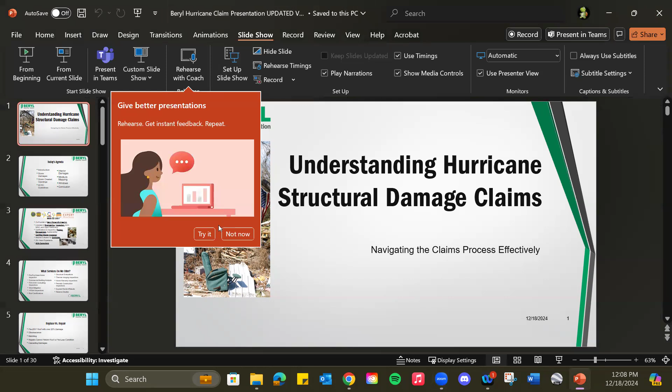Next slide. The bottom right is the flood. There it is. Next slide. I always wanted to say next slide.

We're going to talk a little bit about an introduction, which we're currently in, a brief overview of what storm damages are or not. Talk specifically about storm created openings, a nice buzzword insurance companies are using to deny a lot of claims. IICRC guidelines, basically mold assessments, mold remediation guidelines, interior damages, some moisture mapping, stuff about windows, and then a conclusion to wrap it all up. And we're going to get through all that in 40 minutes. It's going to be exciting.

Next slide. Who am I? I'm one of the founders of Beryl Project Engineering. I believe we've done work with most, if not all, of your firms before. I have licenses in engineering, inspection, mold assessment, mold remediation, wood destroying organisms, liquor distribution, certifications in inspection, project management, sustainability, certified master inspector, neutral evaluator for sinkholes.

So I have been on the umpire side of the table. That's always fun to do. That should change the 20 years to 25 years, I guess, and a 203K consultant.

A little bit about Beryl. We offer the gamut of inspections, everything from your pre-purchase home inspection to the point where the state of Florida had us do 18,000 inspections for the My Safe Florida Home program. We'll do commercial building analysis, FHA 203K and consulting inspections. That's the kind of sandwich your renovation loan inside of your mortgage. Windmits, 4 points, roof certs. This is the to get insurance batch.

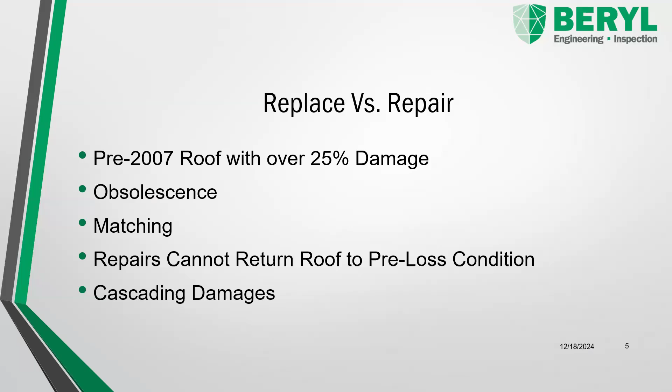Next slide. In addition, we'll be arguing about storm damages. These come straight from the National Academy of Forensic Engineers, December 2020 edition: broken tabs, broken tiles, lifted shingles, kicked tiles, which are those that are kicked up, crease shingles, which are my favorite. I love explaining to a jury how to find a crease, the difference between a storm-created crease and an age-related or person-related crease. Missing tabs, missing tiles, those are easy. Impact damages, those are easy. Stained sheathing is my storm-created opening. Damaged soffits, vent metal warping.

But back to the broken tabs and lifted shingles. I'll spend a lot of time in depositions talking about when a shingle ages and wears, tear and deterioration, a common defense. That one sits with: the shingles are just old. And I'll sit in deposition after deposition and say these shingles aren't old. When a shingle hits the end of its useful life, you have a surfboard, and on top of that you have roadway. The roadway starts to fall off, and you're left with the surfboard.

You'll end up with frayed edges around the side of the shingle. You'll end up with silver streaking you can see from the street on the shingles. You get close to the shingles, and you won't see granules anywhere near the edge or middle. There's this tool a lot of field adjusters will use, a Haag tool, and they'll slide it into a shingle and say 30, 15 - that tells you how much useful life's left. I use those photos time and time again to disprove age-related deterioration because the tool that they don't know what it means, they just know to take the photo, is saying this roof doesn't have any age-related issues.

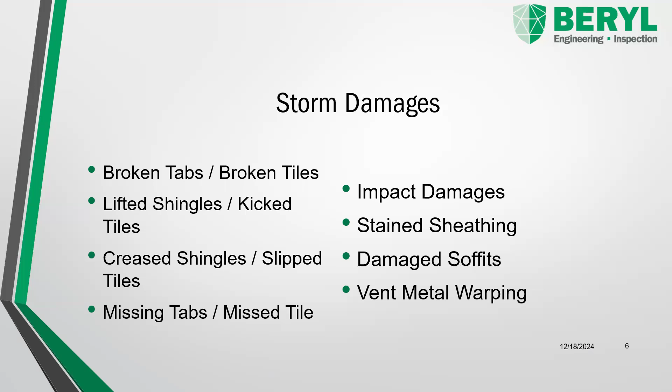Next slide, here's some pictures. This would be a good example of an old shingle. We have all this missing granules here. We have this crease here going this way - this is the bad stuff, this is stuff we don't want to find. I do have some creasing here, but with all this stuff here and here, I'm going to say that's probably age.

This is a broken tile. This is in a good high foot traffic area. It's a nice circular hole. I got something coming in - it's going to be foot traffic. I look for this, I look for the hole, I look for radial cracking from where the foot hits. It's in a high impact walk zone, so that's going to be more age-related.

This one's another bad example of a broken tile for wind because it's in a corner. It's got an apex crack that goes across here, so that's going to be from pressure. So what I do like using are right corner cracks. They'll say that's the weak part of the tile. I'm like, great, yeah, it's the weak part of the tile - that's the first thing to get wind damage. That's the way I spin it.

They're like, the manufacturers even know this is the weakest part of the tile. I would expect to find right corner breaks on wind damaged roofs, because that's where wind's going to manifest first.

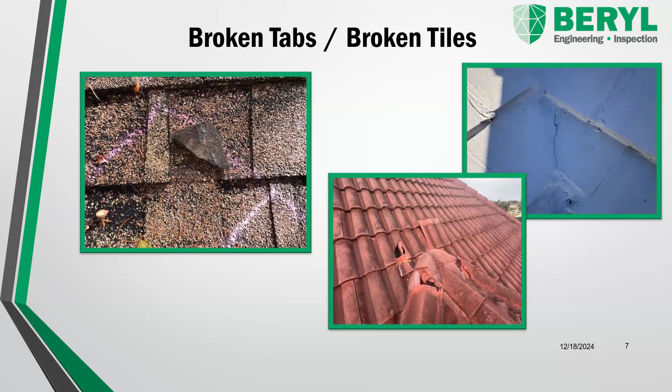Next slide, lifted shingles. Again, we've got something that's kicked up in this direction. Newer roof, you'll hear stuff about mat transfer. What that's talking about is right here, this is the sealant, sometimes it sticks to the top of the shingle. They say mat transfer is used to say it's not wind related. I say it is wind related. The shingle's been forcefully torn up, and some of the seal is now on both parts of the shingle. So I look for that in my wind damages.

Here's some kicked tiles. This is a whole section here that was removed by wind. High impact wind zone, I want to see damage according to the hips. I've also got missing pieces of tile here, this is in the upper right hand corner. Again, stress cracking from wind because that's chattering. Same thing here, so this is some juicy storm damage right here on both of these.

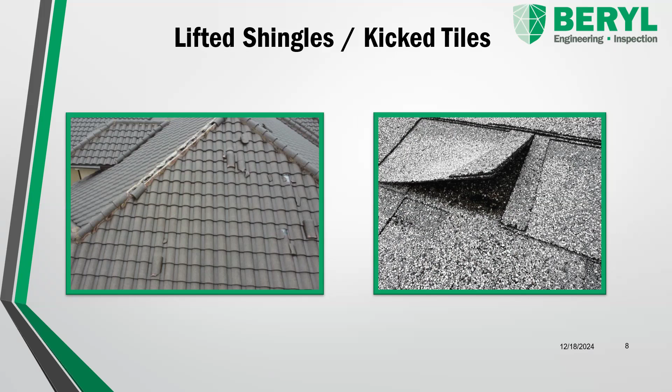Next slide please, crease shingles. Again, we're looking for this line here, and I had more that were subtle. But I wanted to have some that you could see from a distance, because I've been in presentations with a chart you can't see. So I went a little bit more obvious on this, but I'm used to this light creasing here, something even a little lighter than that. I'll use that with the jury. I'll show a jury how to find crease shingles at this point in the shingle, and then they start finding it themselves later in the photos.

These are slip tiles. What I like about slip tiles is two things. If it's held in place by a fastener, that means the fastener hole is enlarged, that tile is damaged in the area you can't see. I do that all the time. If it's gravity held, even better. The tiles have all slid out of place and now there's a whole bunch of holes underneath there in the underlayment. But what's neat about the slip tiles with a fastener is that tile has cracked and allowed the tile to slide down, that nail hole is shifted, and those are all potential storm created opening points.

So that's fun. And then here's our mega slide showing everything: flapped over shingle, creased shingle, there's a subtle one, torn tabs, missing shingles, just blown off. This is a horrible example picture that was pulled from stock photos, so I'm creating that for our viewing enjoyment. And the reason why I can tell is because this is too perfect and none of these nails are rusted.

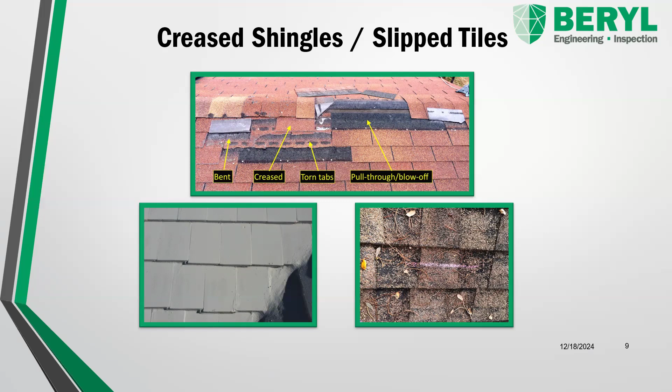So here's an example of some missing tabs. This is more like what we'd expect to see, very jagged at the top. And then, obviously missing tiles, or missing tiles.

So stained sheathing, here comes the storm created opening argument. I will argue a causality effect. We are not going to remove every shingle to see the holes that were created in the storm event. But if we have staining in the room that we're standing in, the interior, and we have staining above that in the attic level, either at the trusses or at these junction points, we have staining in the attic and we have staining in the interior and we have functional storm damaged shingles at the roof level, that's a storm created opening.

Now you'll hear stuff about wind driven rain. Well, if it was wind driven during a storm event that went through a roofing system and it hasn't leaked since, it's a storm created opening. Storm created openings conceal themselves after the fact. The mere fact that water came into the building during a storm event is a storm created opening. The exception would be if there was a vent and the water blew into the vent and then came down, that's wind-driven rain. But all this other stuff they're talking about as wind-driven rain, those are all storm-created openings.

It's functioning fine up until the storm. You now have stained sheathing. So all you have to do is show functional damage directly above where we have all this stained sheathing, and we start to draw the parallel causality effect, which wins time and time again.

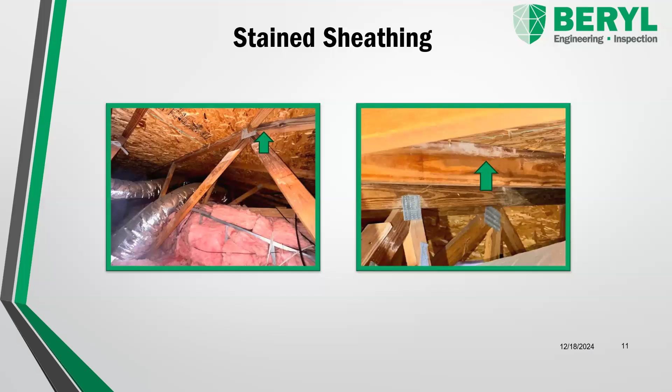To do that, next slide please. Oh, we talk about that again later, that comes in a later slide. I thought that was a good beginning for that.

So the other thing we looked at is you'll get arguments that, and Rimkus and Haag love to use this one, these are the areas of the roof that we would expect to see damage first. That chart, table 301 in the Florida Building Code. I would agree with them.

Normally, those would be the areas that expect to find damage first. However, the Florida Building Code makes up for that because you need to build that section of the roofing material with starter shingles, extra nails, extra bowl (sealant) — all the stuff you don't use in the rest of the roof. So the argument goes away when you say these areas are more prone to wind damage, but they're actually built stronger. So you can't use that as a guideline for the field damage we talked about earlier, because that wasn't built as strong.

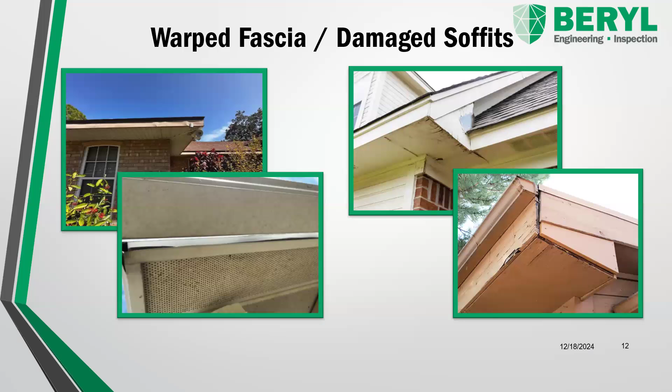Next slide. We look for suction damage on these soft metals — these are like soda cans up on the roof. So we look for crinkling here. My favorite: tile roofs with 4-foot offset vents. Those crinkle and crush like a can. I love seeing that on a Hurricane Ian claim when they're rusted. If they're rusted, it's Ian. If they're not rusted, it's Milton. Takes about 2 years for that rust to set in.

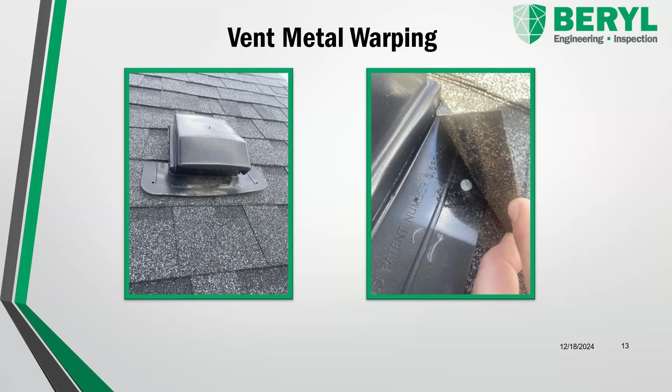Next slide, please. Now we're to where I should have moved the stained sheathing — if we do this again, move the stained sheathing here. So how do we create the storm-created opening, the causality effect?

We use sample squares, the scientific method. As scientists, we're allowed to use a sample size to determine a whole. We try to avoid being technically exhaustive. The best way to inspect a roof would be to tear off the entire roof, look at the entire underlayment, then the entire sheathing — but that's not going to happen. The next best thing would be to inspect the entire roof and try to lift the bonds on every single shingle — also not going to happen.

So in 2004, Haag came out with a test square methodology they used for hail damage: find 100 square feet of roof, count how many hail strikes are within that 100 square feet, and if there's more than 8 hail strikes, the whole roof needs to be replaced. We started using a piece of it for wind damage claims, not the 8 — we go back to the 25%. Haag has now publicly discredited their own methodology.

So now we've shifted how we're presenting it. We no longer call it the Haag 2004 test square methodology — we call it a scientific method, sample square methodology. Still works. So Haag has just discredited their own methodology for no reason, because we still have a way to use it.

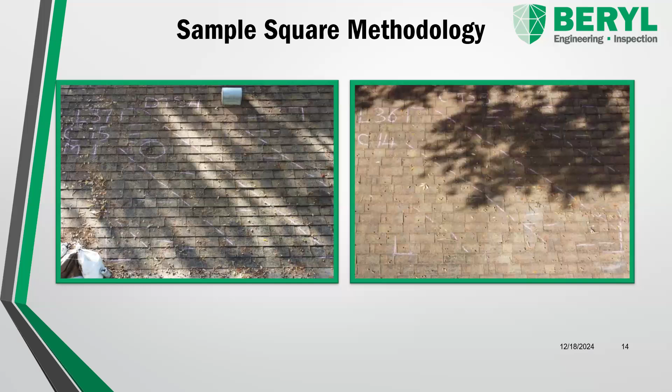Do you suggest taking your sample square where there is damage? Go directly over it. Yep, directly do your sample squares over it, because now we've got storm created openings. You want to do it, it's the easiest way to show it. You say, I'm standing in my living room looking up, I'm in my attic above the living room looking up, and now I'm on the roof looking down. Damage, damage, damage. It tells the complete story.

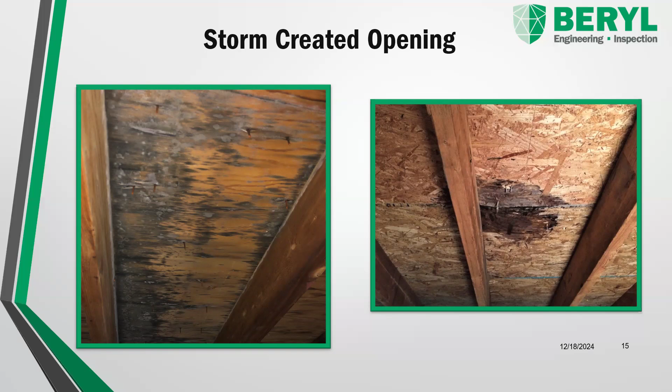IICRC guidelines. So basically now what I love to do is, there's this common misconception, and I have to do this in every single mold assessment deposition, they're like, what kind of mold is it? Did you send it off for laboratory testing? You do not have to do laboratory testing. It is such a common misconception. It is a test question, mandatory to get your license. It is a mandatory test question on all the CEs to maintain your license. You do not have to test to know what the mold is.

If it's present, it needs to go. If the drywall has been wet for more than 72 hours, there's enough literature out there to say some level of mold exists there. So you can start tying into your claims some level of mold remediation. I know there's caps and limits on that, but that gets you drywall cut out, not repainted. That gets you entire rooms repainted. If the stuff's touching the baseboard or the flooring, we've got flooring that needs to be removed, and you guys all love the continuous rule—if it's continuous, we've got to do the whole thing. So this is how we get there.

All we need is something that's wet for 72 or more hours. So with a Hurricane Milton or an Ian, where power was out for 96 hours, we're there. We've got mold there. Might as well just start including it.

Water will be divided into 3 categories and 4 classes. Categories: where did the water originate? Clean water, basically from the sky. Gray water, stuff that's run through pipes and started off as clean water. Or black water, sewage and stuff that's run—like if a supply line breaks, I'll call it clean water or gray water. If a sink faucet breaks or something, that's going to be black water. So the thought behind that—other mold assessors take the stance that if it comes from the sky but makes its way through your roofing material, is it still technically clean water? I take the stance that it originated in the sky, so I would call it clean. So for pretty much me, I pretty much stick to categories 1 and 3.

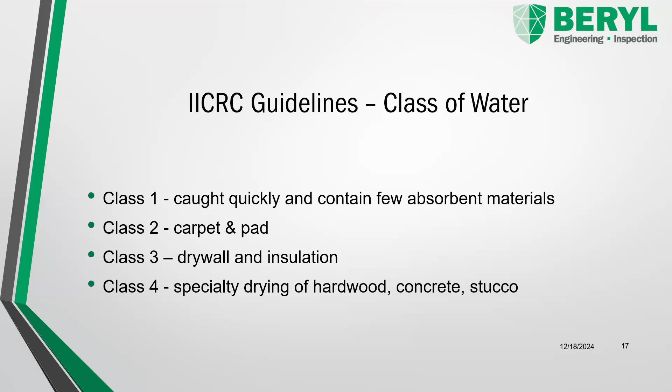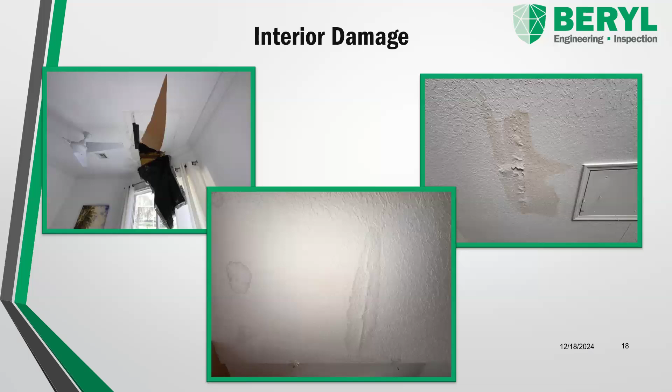Next, the way we're going to find this out is using thermal cameras, predator vision for the Arnold Schwarzenegger hiding in the jungle bush, or moisture meters. The neat part about the thermal camera is it gets us in the area of the potential. Then we can hit it with a moisture meter and it's going to be wet or dry. If it's wet, it's an active leak. If it's dry but shows up like this, that's a former leak.

What's neat about this is I can tell all the insulation's been pushed away, so that insulation is not how they installed it. The only thing that would have caused that are rodents who decided to take that insulation elsewhere, which wouldn't be at this level, or a water effect that pushes all this insulation down towards the ground, and now you're just left with that temperature differential. So even if the leak isn't active, we can still use thermal cameras to prove that it happened, which ties back to a storm created opening. It was leaking during the storm event, it wasn't leaking after. More proof it was storm created and storm sealed. Still needs to be remediated.

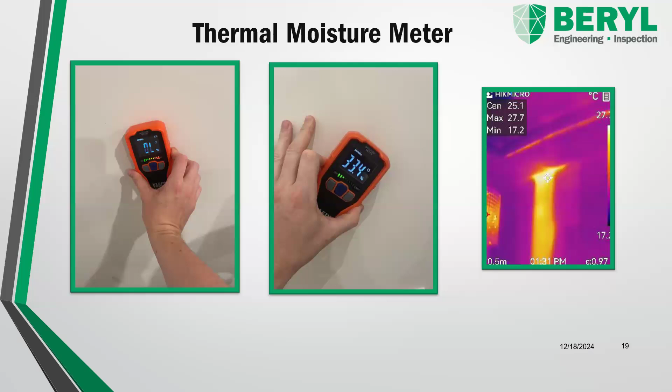Next slide, please. I want to talk about windows. Love windows. So if you look at FEMA P62 and 752, and the North American Fenestration Standards 2017, 2022, they'll talk about pressures necessary to overtake windows. They're a lot lower than you think. People think they're putting up storm shutters to protect their windows from hurricane pressure. No, it's just hurricane debris. I have seen windows blow out and shatter with sheathing plywood or storm shutters on the windows. Those shutters are just there to stop debris from coming through, not for the pressures generated from these storm events.

So you have to think your house is normally under positive pressure. And if you think about how we track hurricanes, we track them by their pressure. It's moving at 75 mile per hour gusts with 989 millibars. Then they get to 899 millibars, and now we're looking at category 5, 157 mile per hour sustained winds. The fancy physics equation, PV equals nRT, explains the science behind that. But when it comes time, and Shay's heard me do this before, I never track the wind speed of a hurricane, I'm always tracking the pressure. Lower the pressure, the stronger the storm. Even if the storm starts to weaken, the lower the pressure was, the more energy the storm has. And that was the big talk about Milton, the fact that once it became a category 5, we were still going to see these devastating winds no matter what wind speed it actually hit when it hit St. Petersburg, and we saw that from the Trop roof. The energy that happened when that thing was category 5 is what took out the Trop roof, not the 90 mile per hour winds that hit it.

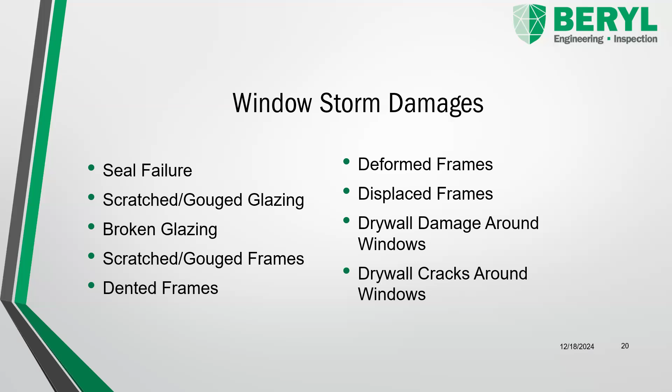Next slide, please. So we start to see areas here, like the argon gas that's in a dual pane window, we start to see that's all fogged. We can hit it with thermal cameras, we can see the energy just leaving, but this is what we're looking for with seal failure. When seal failure happens to a window, the glass needs to be replaced. Can you replace the glass reasonably without replacing the whole window? Well, different arguments in different directions there. Next slide.

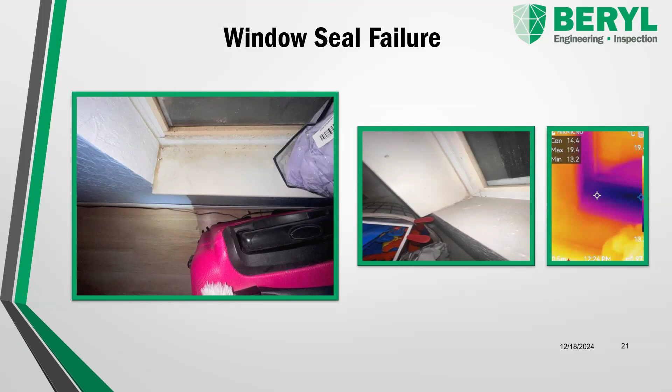These are from impacts. I think this one might have been a raccoon attacking a window. That's like a new Blumhouse movie coming out next month about the wolf man. This is what happened to this window - feral child. Yeah, that's an impact.

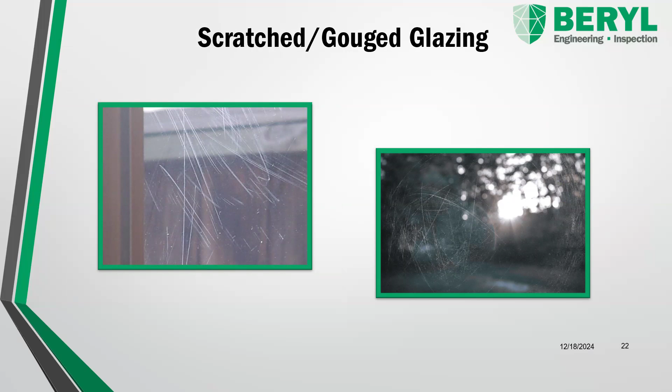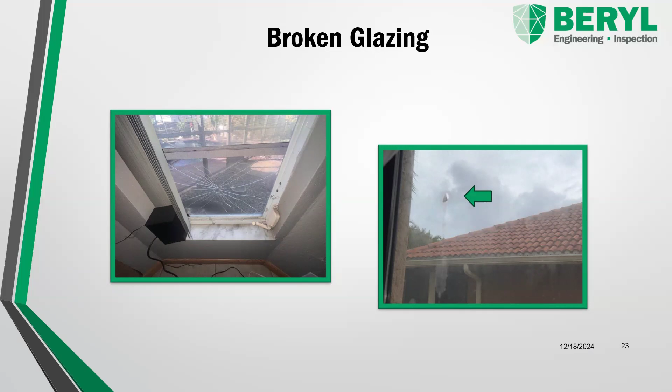So basically we're looking for impact damage to the window, but we're mostly going to find seal failure like we saw on the one before it. Broken glazing, shattering the windows, damage that's not even full shattering - that's what we're looking for. But again, seal failure, thermal cameras, that's mostly what we're going to be using, because this stuff is great, but we don't find it too often.

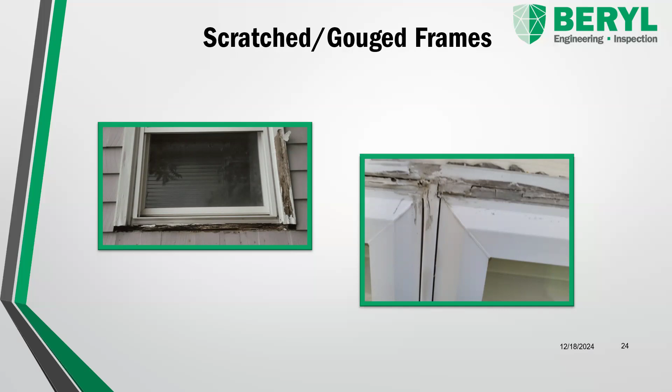And then we look for separation of the framing. They'll argue maintenance. Sometimes there's something called Sebo analysis, where even if you have damage from lack of maintenance, if a storm event caused further damage, the storm event damage is still covered. So even if they're saying wear, tear, and deterioration is a defense, something called Sebo, S-E-B-O, can be used to overcome that if there's concurrent damages. Concurrent damage language is fun, and some insurance companies are better than others at cleaning that language up. But I hear Citizens still has some Sebo holes in their language you can use.

I often laugh when there's like, oh, these hurricane clips will protect my roof. Yes, your whole roof will come off in one chunk. We've seen that numerous times - the whole roof comes off in one big piece. The shingle's awesome, underlayment's fine, the roof is next door. So it's just still a system, and they have yet to figure that part out.

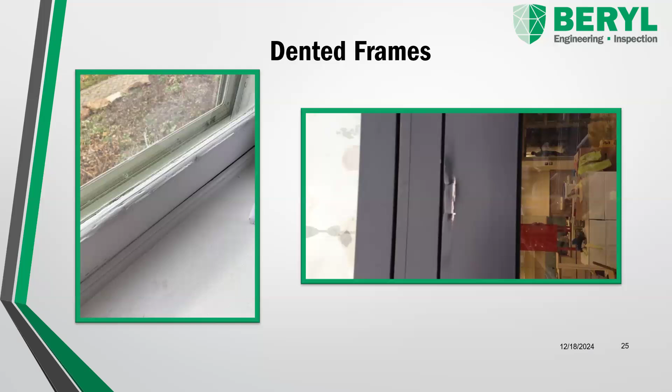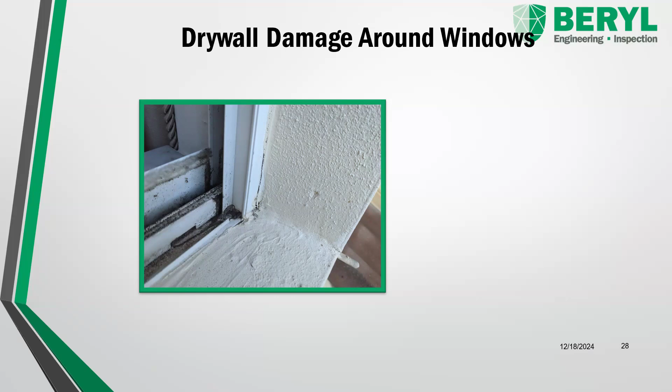And then we have cracks around the drywall. This is the exterior, so ignore the fit photos here - drywall cracks around the windows. So when your house is under, and I talked about this earlier, windward and leeward forces, you've got cyclical deflection happening to the roof, to the window walls. You have suction pressure happening. So basically what's happening is your house is breathing during the event. It went from positive pressure to negative pressure. So the house flips from how it normally sits, starts flexing, it starts breathing.

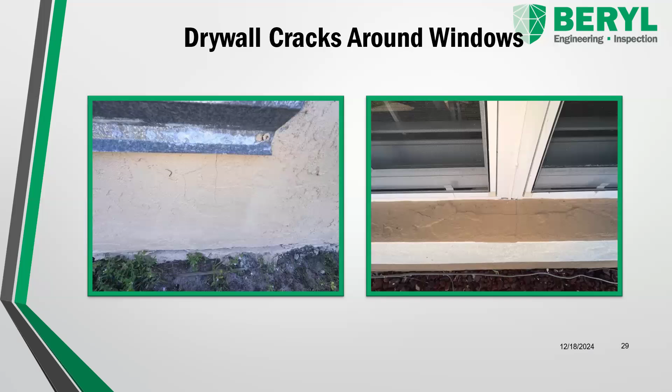That is it, awesome. So right on schedule, got two minutes for questions, so yeah, I got some questions.